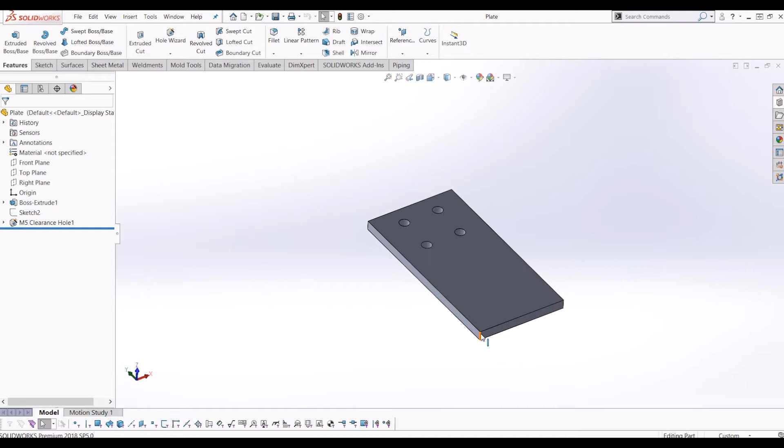To get started, I've got these two plates here with 4 holes through. Just to show how I quickly modelled this plate, if I go into the part, I've modelled a 5mm thick plate with 4 holes. In my reference sketch, they're 10mm from the edge, centered on the plate, and 20mm apart.

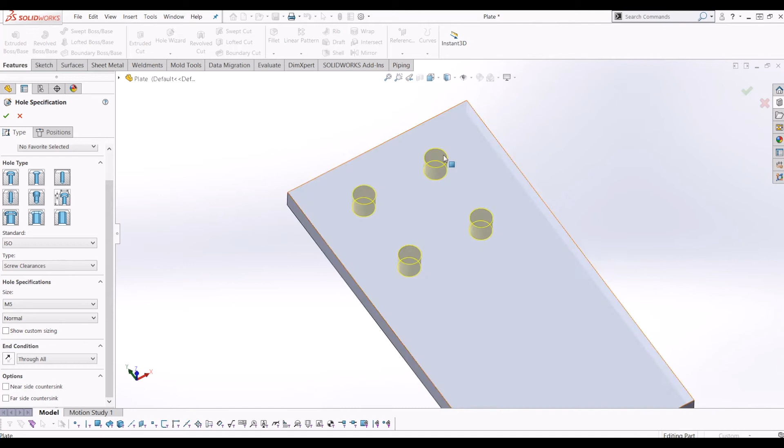To create the holes, instead of an extrude cut, I've used the hole wizard and gone for a metric clearance hole for an M5 bolt. This helps when you're using the toolbox, because SolidWorks knows you want to put an M5 bolt through that hole.

So if I come out of the part and update my assembly, I've assembled the same plate twice, as if I want to bolt this together.

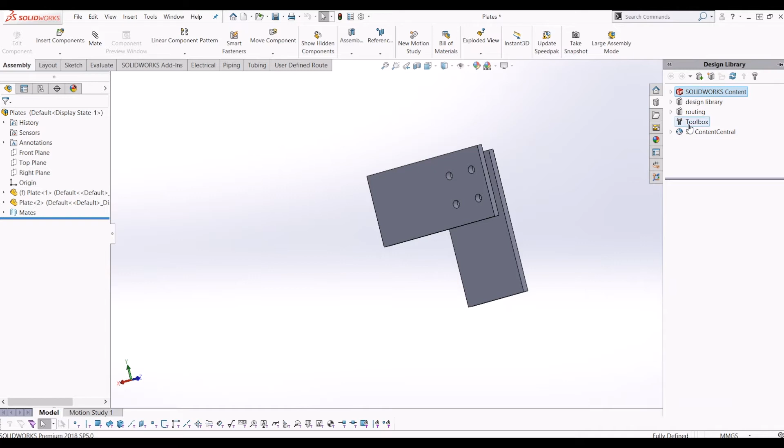Now I'm going to go up to these little books on the right hand side, which is the design library. Go to Toolbox, and now it's come up saying your toolbox is not added in. As a default, SolidWorks doesn't load up the toolbox, because I think it speeds up the loading time.

If you click add-in now, it turns on the add-in. If you want your toolbox to always load up every time, go into settings, add-ins, tick toolbox library, and then tick startup, and it will load up every time.

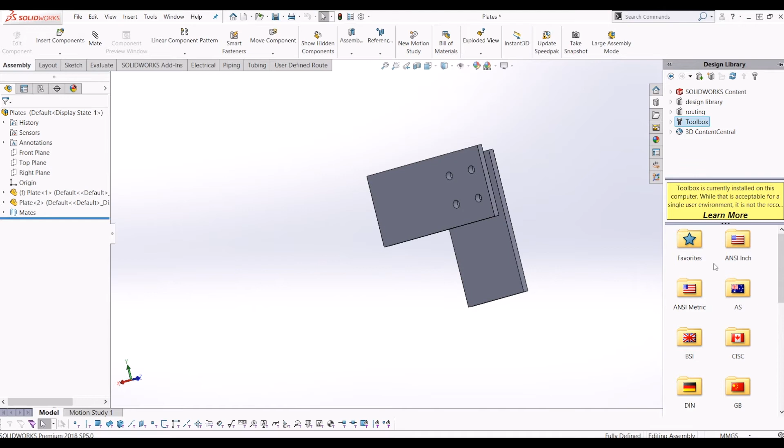Because I'm British, we'll go for British standards, BSI, and I want a bolt. You've got all your standard nuts and bolts for this standard, so you can have different standards for different countries. You've got your American National Standard Institute (ANSI) bolts and fittings, but I'm going to use Europe ISO, specifically BSI.

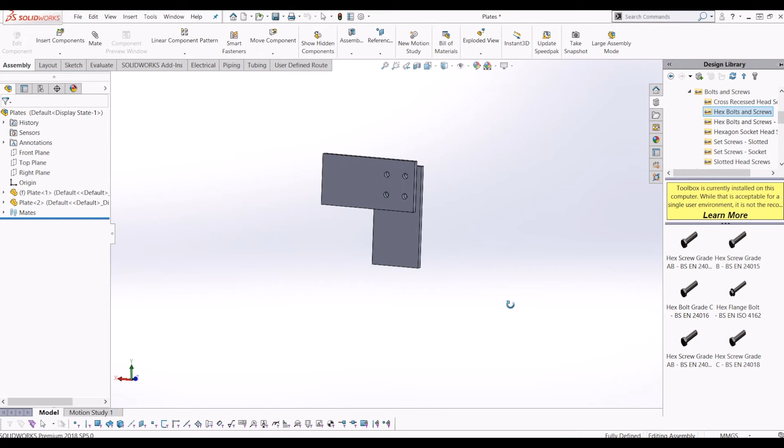So I'm just going to go for a hex bolt. Click the grade you want, and it's as simple as dragging and dropping it into your assembly. It detects the size of the hole, so it came in massive, and it's detected that this is an M5 bolt because I used the hole wizard.

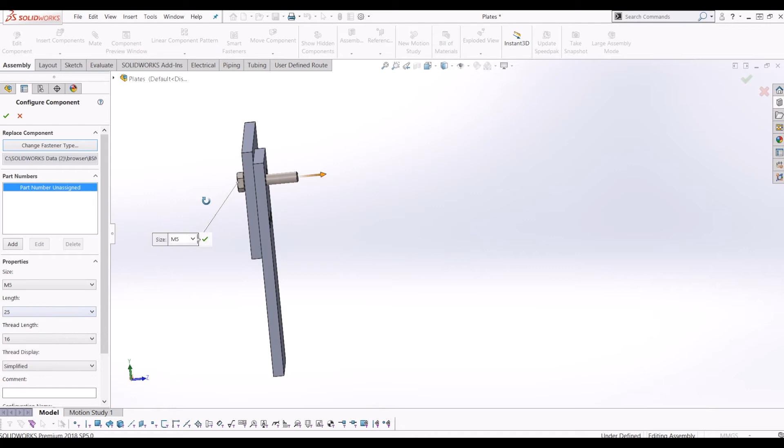So it's asking, is it an M5? Which it is, and then I can select the length. For this standard, the minimum bolt length is 25, so I'll leave it at that. Thread length, I'll leave at 16, and simplify the thread display so it doesn't crash your computer.

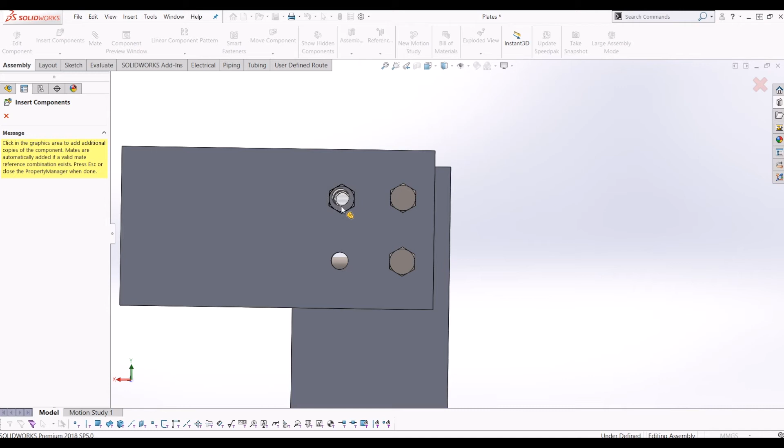If I tick that, now this is selected as an M5 bolt, and I can click as many holes as I need to put that M5 bolt in. I've had a rogue click over there, so if I just escape - this one bolt here, I can just delete.

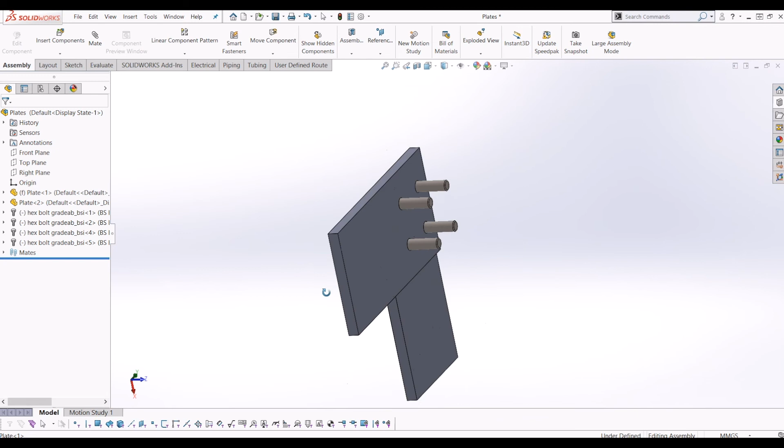Now I've got an M5 bolt going through these two plates. I need to put the nuts on. Same again, if I go to the standard I was using, BSI, bolts and screws, but I want to go to nuts, hex nuts, and we'll go for a standard hex nut grade C.

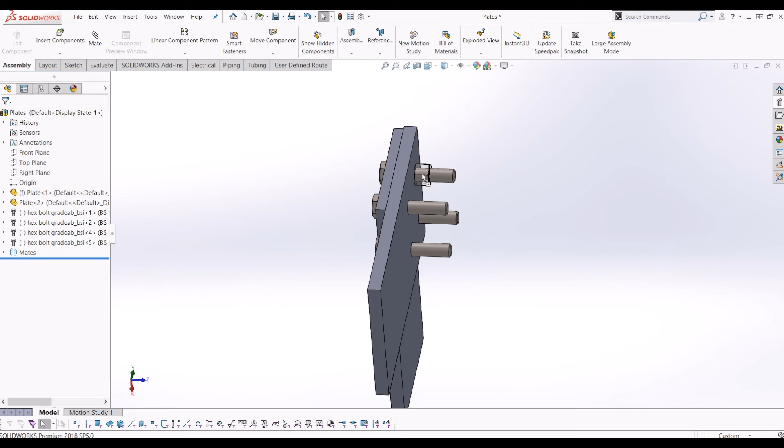Drag it near the bolt, it detects it's M5, so it puts it to the right configuration, let go - M5, and then same again on the left hand side, select your settings that you need, tick. Now I've got this M5 nut, and I can place this on any bolt I need to.

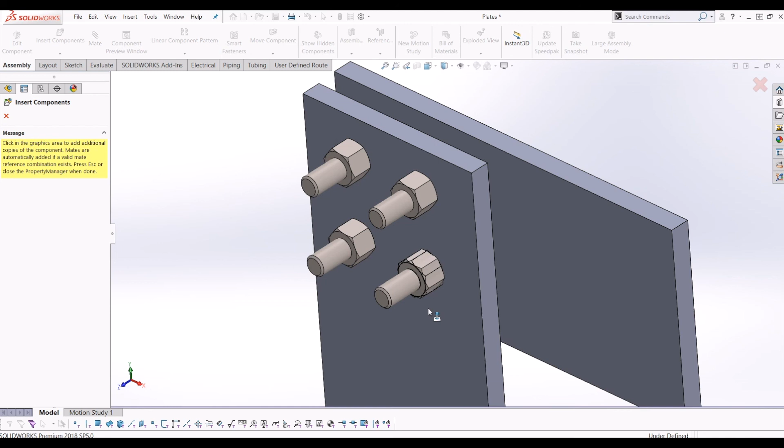It's just as simple as that. And there we go. And there you have it.